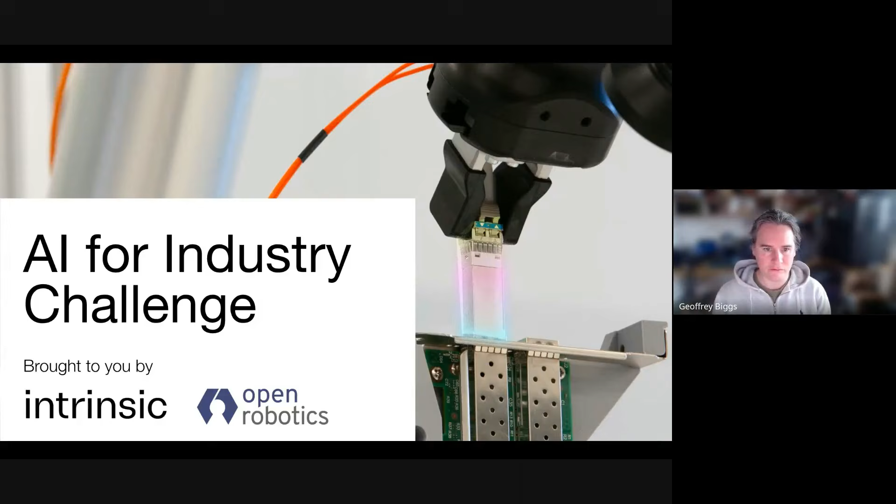I'm very excited to see this challenge kick off. It's been really exciting to see it come together. We've been involved in challenges at Open Robotics for many years, probably going right back to our founding, and we've seen just how amazing they can be for bringing people together, for bringing collaboration out, for triggering people to solve really complex problems. We've seen some amazing challenges over the years. My favorite is the sub-T challenge, which we did a few years ago, where people were sending robots into mine shafts to try and find stranded people.

It was amazing to see, and I'm really looking forward to seeing what this challenge brings out in terms of industrial AI. We're also very proud of how pivotal a role open source robotic software such as ROS and Gazebo plays in these challenges. Because these tools are free and anyone can use them, they really allow everyone to take part in challenges and see what they're able to do.

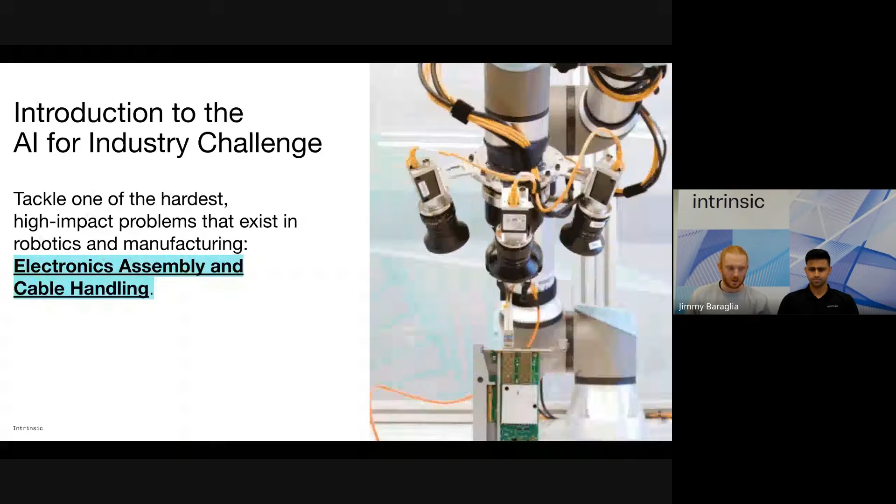So this challenge isn't just about incremental gain. It's about bringing state-of-the-art AI and robotics to this new wave of electronic manufacturing, and especially to cable handling. We are inviting you to solve the unsolvable: mastering flexible materials such as cable, detecting small connectors, and inserting them into a highly unstructured environment. This, in turn, will help power the next generation of global automation.

During this challenge, you'll be able to register your team. Reminder that we have a deadline for registering the team on April 17th. We are also welcoming partners to this challenge. You've just met Jeff from Open Robotics. We're also working with NVIDIA and Google DeepMind, and I think Yadu will tell you more about that in a later slide.

Now, this challenge comes with a significant prize pool of $180,000 that will be divided between the top 5 teams. The team that places first at the end of the challenge will receive a staggering $100,000. The second team will receive a very good $40,000. The third team, $20,000. The fourth and fifth teams will both receive $10,000. This will be a really competitive challenge, so we're looking forward to seeing who the top 5 teams will be.

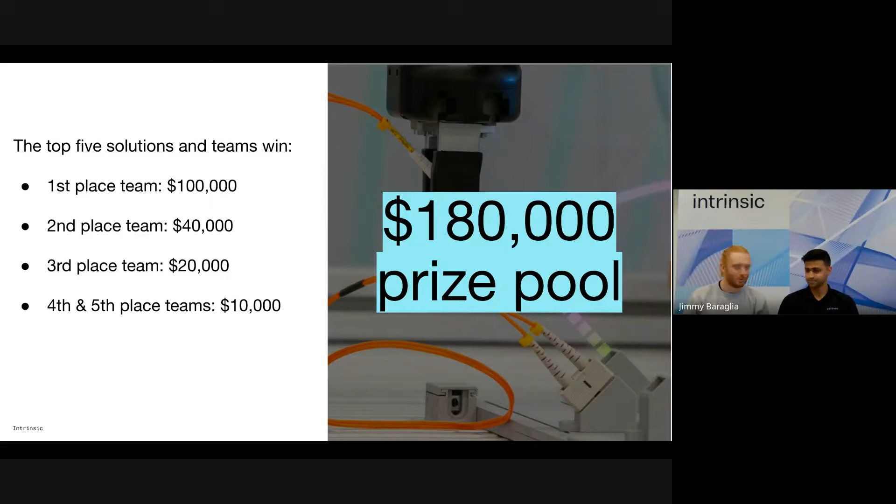Now, what task are we asking you to do? We are really looking at a high mix of cable handling and insertion. We took inspiration from data center and server assembly, and built a task board that reflects both of these aspects. There will be a high mix of cable types, 2 or 3 cable types with multiple connectors, and a network interface card. This represents what we've seen.

And why is this task difficult? Detecting different components and handling cables in a high mix environment is really difficult. There is also a very high cost of error. If you fail just one cable insertion, or if you damage one component, a whole server can be compromised, or a whole set of servers will be unavailable for AI inference.

And there is also a lot of complexity in modeling this high contact manipulation task and manipulating objects with deformable components. So you will be tasked with developing a flow policy and robotic behavior to solve this challenge, to manipulate and insert various types of connectors, providing an end-to-end automated solution for this electronic task using that task board.

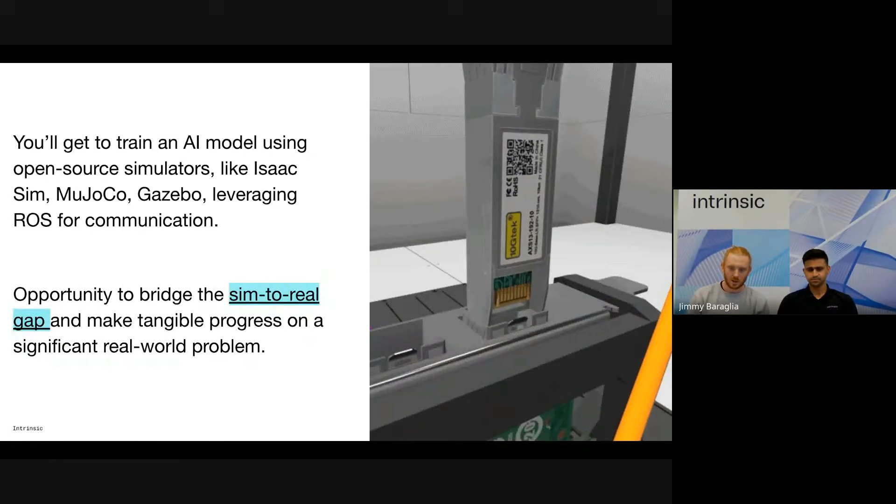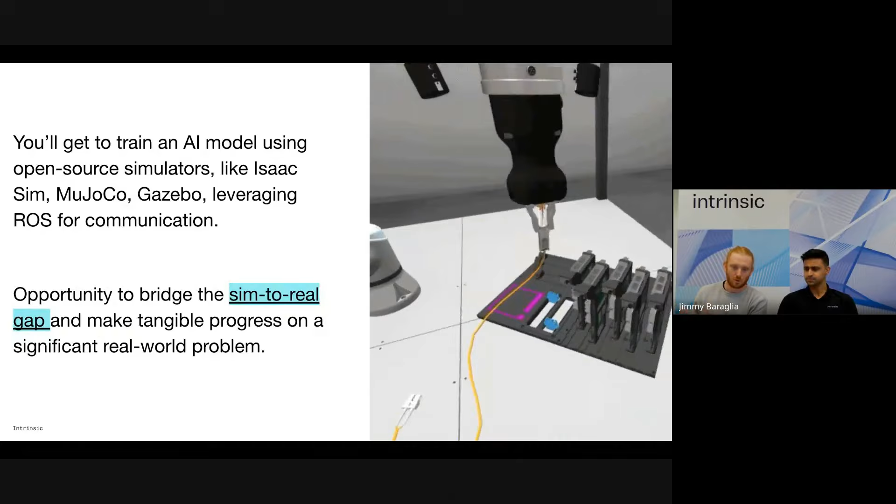To do so, you will train an AI model using open source simulators. We'll provide you with tools for Isaac Sim, MuJoCo, and Gazebo, as well as leveraging ROS for communication. Yadu will talk about that a lot more in depth once we get into the toolkit section. This will also be your opportunity to show that your model can bridge the gap between sim and real, not only working in simulation, but also making tangible incremental progress on real-world problems.

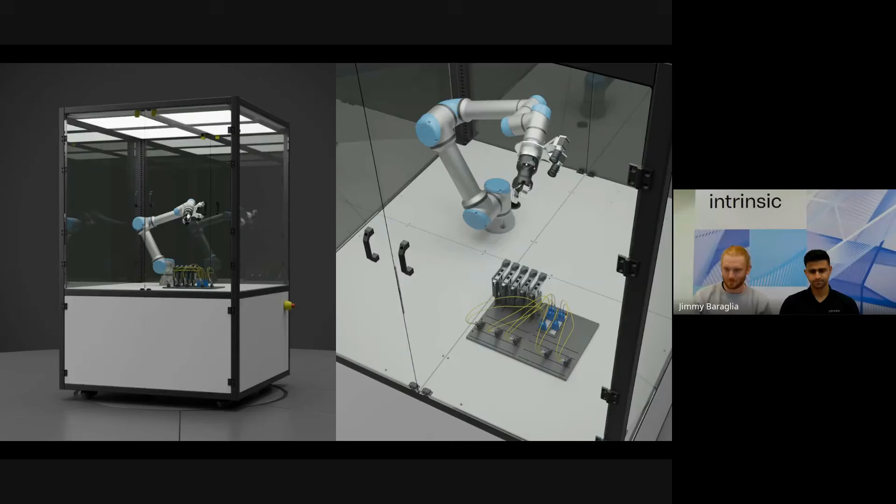All right, last but not least, I want to introduce our evaluation committee. As I mentioned, the goal of this challenge is to show how AI, open source tools, and the Intrinsic platform can add value in real-world use cases, and bring these solutions into the real world, not only in labs, but actually in automation factories.

This committee is a representation of the full automation ecosystem, from AI to robotics to open source and factory automation. They will ensure that the finalist submissions follow the vision of the AIC challenge, and that this vision is well represented in our winning team.

All right, now I'm going to hand over to my esteemed colleague Yadu, who will tell you more about how your solutions are evaluated. Thank you, Jimmy.

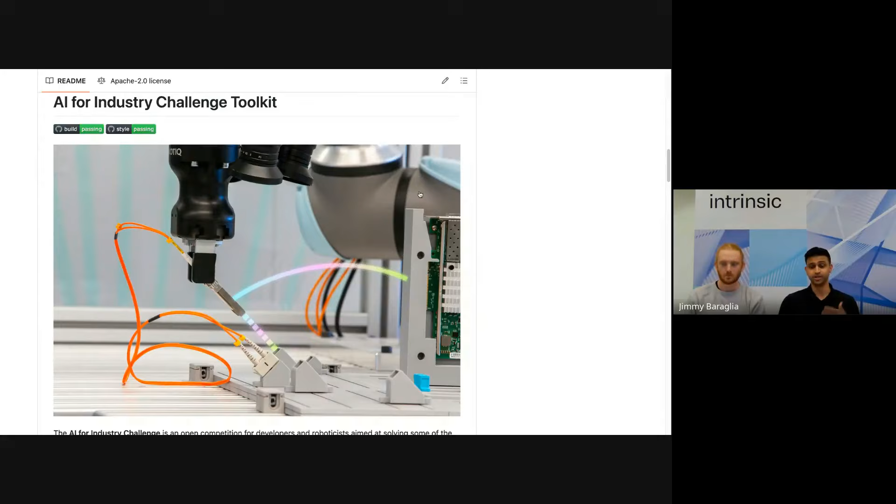Once you open up our toolkit, you should arrive at this nice landing page, which describes a lot of information. Throughout this webinar, we're going to focus on this toolkit guide section, as I feel this contains a lot of information for participants to understand the challenge, understand what's in the toolkit, and provides some guidance along the way, which would be beneficial.

Absolutely, they can come back to this document right here. Before we jump into those exact links, I'd like to take the time to describe the architecture. Now, this is the architecture we have for the qualification phase, and we've made it really simple for participants here. There are two main components in our toolkit: AIC eval, the evaluation component, and AIC model, the model component.

The AIC eval contains the Gazebo simulation environment, including the robot arm with end-of-arm tooling, all of the sensor drivers that we need to pipe data to and from the robots. It contains the task board, the electronic components, and it contains what we call the engine to orchestrate all of these as part of the competition.

All of this is provided by us. Participants don't have to modify any of this. We'll provide them a Docker container which they can use to run all of these systems.

What participants will be tasked to do is implement and package something called the AIC model. This is going to be a ROS 2 node that will have to respond to certain signals from the evaluation container, relating to a task request, to know when the task is completed, or any feedback along the way. We'll get into more about the requirements in just a second here.

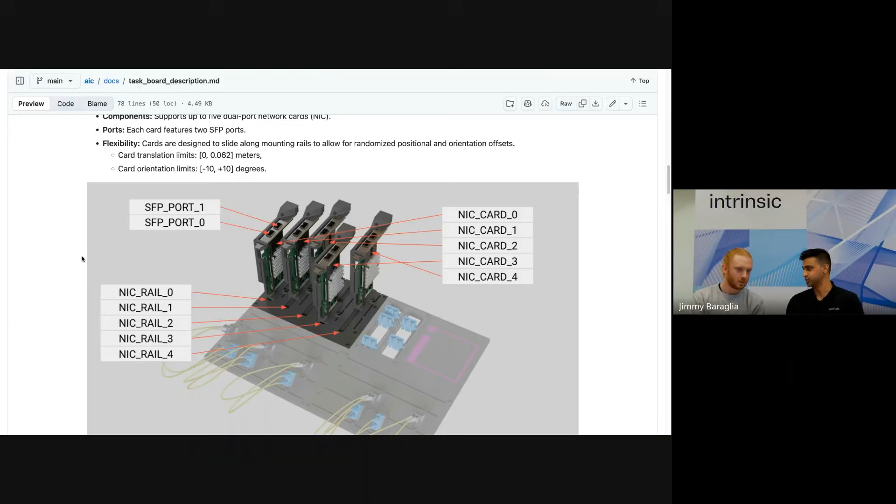Zone 1 is where the network cards will be placed, and during the challenge we will spawn 1 or more network cards, but the insertion task will always be a single insertion that needs to be done. It's important for participants to know what we mean when we say SFP port 1 on NIC card 1, and I'm hoping this document can provide that information. Similarly, they'll also have access to descriptions of the other zones.

We have SC ports that are placed in zone 2, and we also have some notation to clarify the names of these ports. So I do encourage participants to spend some time going through the task board description. It's going to be very critical to their success of their policy.

We also provide some links for them to purchase some of these components if they're interested in, but for the most part, they should be able to work successfully in simulation. And I think the 3D model will be available within March, correct? Absolutely.

All right, so once you're a bit more familiar with what's in the scene description document, we provide some guidance on how to explore this using some teleoperation scripts that we provide. So I'd encourage all participants to spend some time spawning different task boards into the scene, moving the robot around, getting a feel for how the cable behaves.

And while they're doing so, they can rely on their favorite introspection tools in the ROS ecosystem to be able to subscribe to data from cameras, from force-torque sensors, to really get an intuitive sense of the behavior in simulation.

Also part of the scene description document is a way for you to conveniently convert the scene in Gazebo to any other simulation. Out of the box, we're providing some converters to MuJoCo and Isaac Lab, but participants are free to use similar workflows to convert it to any other simulator of their choice.

So just as an example, by clicking through the MuJoCo guide, participants will be guided through the process of converting the Gazebo scene to a MuJoCo scene and being able to control the robot using the same ROS2 interfaces.

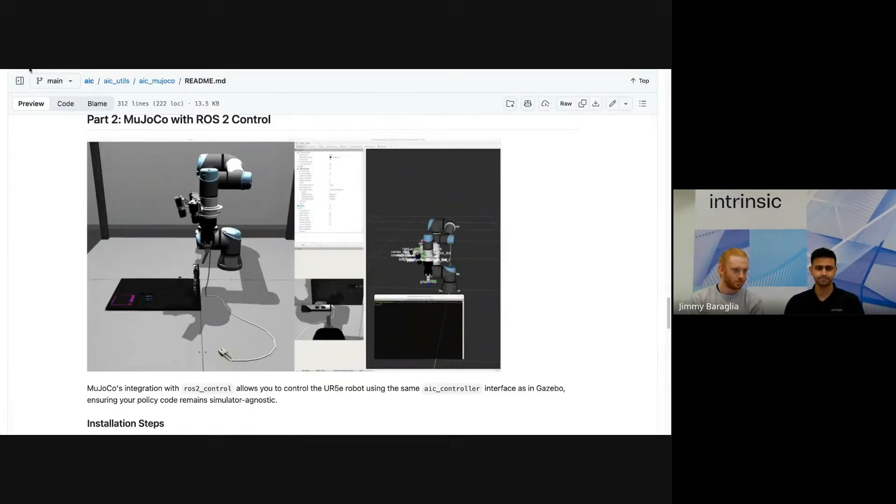All right, with that, I'm going to jump back to the qualification overview document. What's important to clarify is the scope of the task. I think we've stressed this a couple of times.

We'll be conducting several trials. In each trial, participants will have to do a single insertion only. The initial state is very narrowly constrained. The robot is always going to be holding on to one end of the cable, and there will be no unseen port or plug types.

Whatever you will encounter in the challenge is already in the toolkit in our assets directory. So it's worthwhile for participants to explore the assets that we have. The idea is that they can then focus on the model for this phase.

Precisely. And just a quick note on how the task will be described to participants. We have this ROS2 action request, which we'll be sending to participants when we want them to start doing the insertion.

And when we look at the fields in this message, they're mostly relating to the type of cable that's in hand, the type of plug that's in hand, the port we want to insert it into, and the component in which this port exists. So together with that information, participants should be able to engineer to fulfill this task.

A quick note on the orchestration engine. So we have a process called the AIC engine, which will be responsible for basically running the challenge. It will be spawning the task board into the scene, spawn the cable, and attach it to the robot gripper. It'll then give the task to participants to execute.

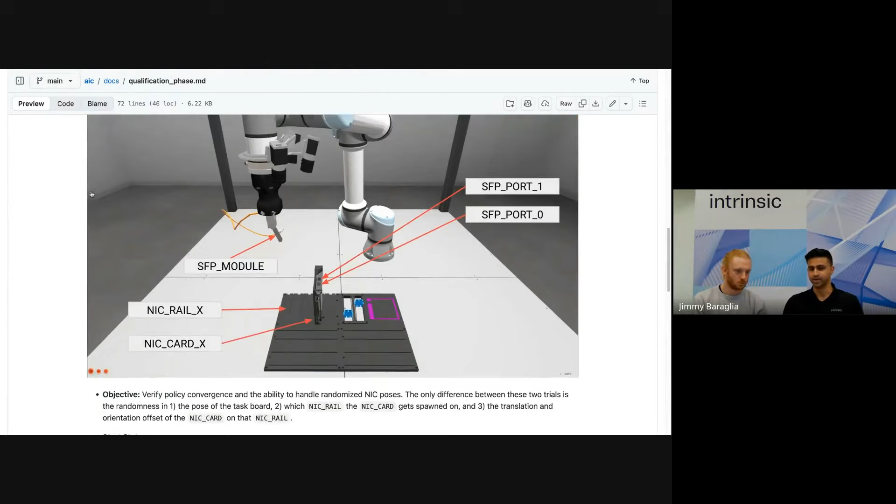And all of this can kind of be configured in a config to pass to the AIC engine. So that's also an important document for participants to look into. The remainder of this document details what the initial conditions look like for the different trials.

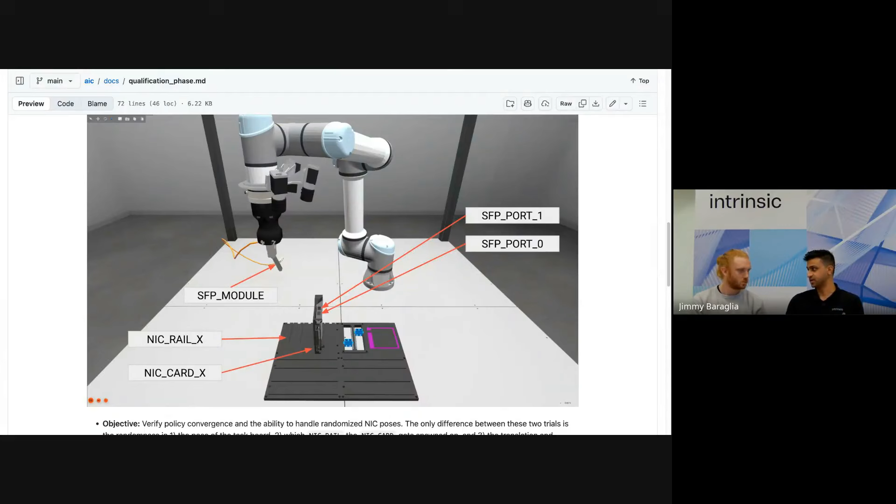We'll likely be running 3 trials for evaluation. And for all of these trials, you will see some combination of these 2 setups. So setup 1 is with the SFP module grasped by the robot. And the task will be to insert this SFP module into one of the SFP ports on any one of these NIC cards.

The second configuration participants can expect is grasping the other end of the cable. So now the other end has the SC plug, and now they will be tasked to insert this plug into one of the SC ports.

Understood. Can you tell us or tell the participant a bit more about how the submission will be scored? Absolutely. Let's jump right into the evaluation metrics and scoring section. For the qualification phase, we have a tiered approach to scoring, and we have three tiers that we'll be scoring participant models against.

The first tier is model validity. And here we're checking that the participant model conforms to certain challenge rules. And this is a good opportunity to go through those rules really quickly.

First and foremost, we really want participants to honor the spirit of the competition. As developers, we've done our best to restrict attempts to cheat and circumvent the system by blocking some calls participants can make to backend systems. But really, we want participants to think of this as a difficult engineering task and come up with solutions that have potential to be deployed in the real world.

We have some language here related to the prohibition of cheating, together with how we will try to limit some of this to the best of our abilities. But rest assured that all qualifying teams will be assessed individually to make sure that their policies honor the spirit of the competition.

What's more important and relevant to scoring are the technical specifications of this AIC model container. We don't want to be super prescriptive of what's running in this container. It could be a Python node, a C++ node, maybe even a Rust-based node. What's important to us is that this container responds to certain standard signals that we expect.

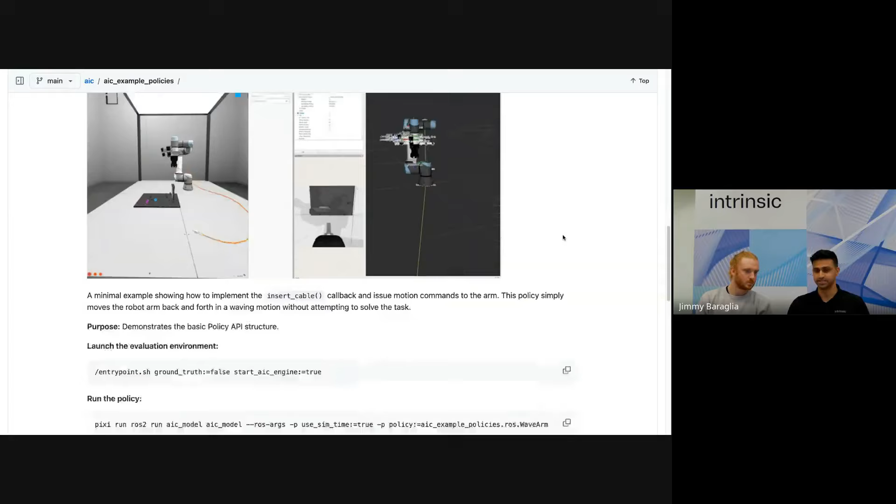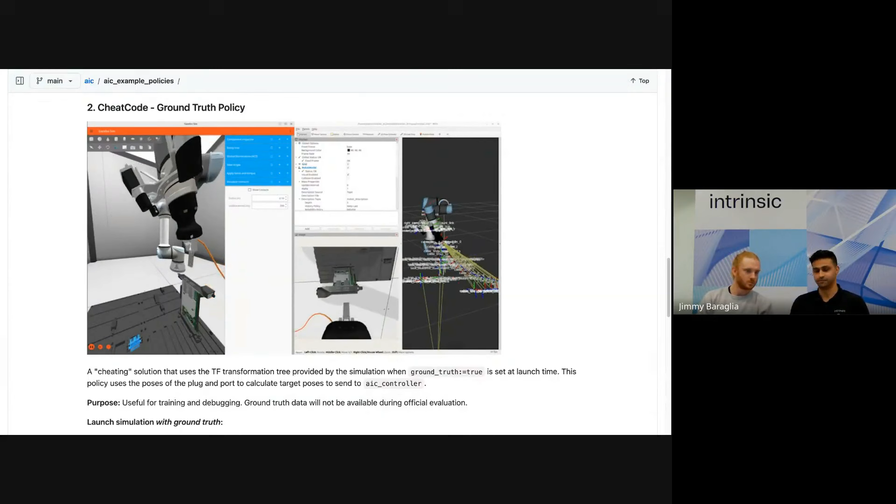We also have something called cheat code, which has access to some ground truth information. This is a way to show participants what not to do. During evaluation, they will not have access to some ground truth information in the form of poses in the scene, and this is a policy that makes use of that information to engineer an insertion.

So they could use that policy to collect data, for instance. They could — that's a very valid use of this policy.

Another policy example we provide is integrating an ACT policy, action chunking transformer policy, which we quickly trained using the LeRobot framework. That's becoming a really popular framework today in robotics, and I'm happy to share that our toolkit actually has some integrations with LeRobot.

Oh, that's great, so it's going to make it really easy for participants to teleoperate the robot, collect data, and train using existing tooling. That's great. There are also several other examples that we encourage participants to look through.

Now, to wrap things up, I would like to walk participants through a getting started workflow so they can get started as soon as possible, maybe right after this call. I'm going to jump back into the main toolkit README and click through the Getting Started guide.

Now, the Getting Started guide expects participants to be familiar with the architecture of the toolkit. This goes back to that main drawing we had in the README with the AIC eval component and the AIC model component. Your code here.

Exactly. And together with that, we also provide some requirements for compute. These are the minimum requirements for running the sim locally on your computer. And we also provide the exact specifications of the cloud instance, which will be reused across all participants' evaluations.

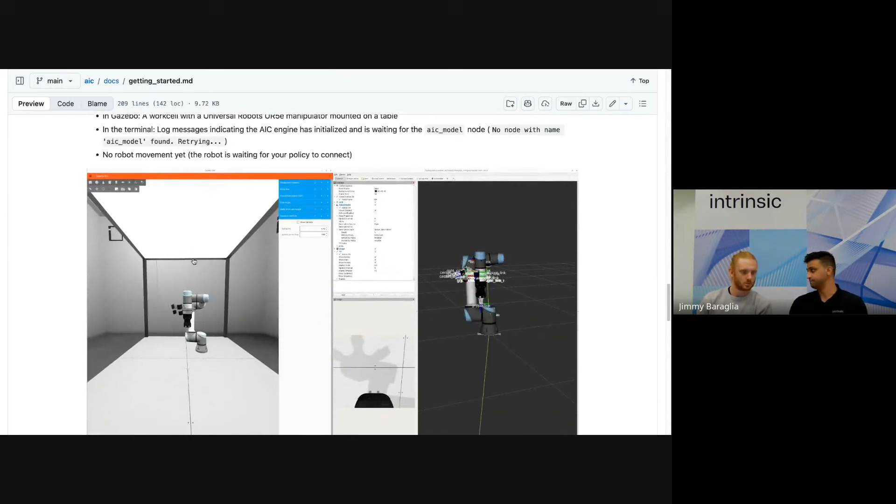To facilitate this, we're actually publishing our evaluation component as a Docker image that they can pull. We're encouraging participants to use DistroBox to load this image, and this takes care of forwarding things like device drivers and kernel interactions, and makes it seamless to bring up GUIs and leverage your GPU in the background.

So by following this quick start guide, you'll be able to launch the evaluation component. You'll be able to see Gazebo with the robot visualizing in RViz, and then you can try running one of our example policies.

So for wave arm, for example - this is a policy that's a bit of an Easter egg, or a joke, I would say. It does nothing but wave its arm back and forth. It's an example of how you could integrate a policy. And what do you think the scoring here is going to be, Jimmy?

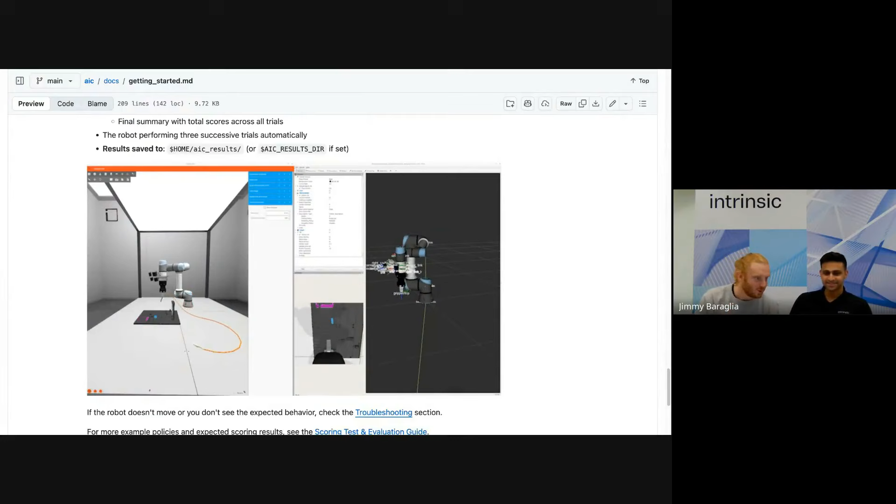I'm going to guess close to 1. Yes, I think that's a good estimate here. You should see a score of 1 as it passes the model validity check, but it doesn't get anywhere close to the actual ports for insertion.

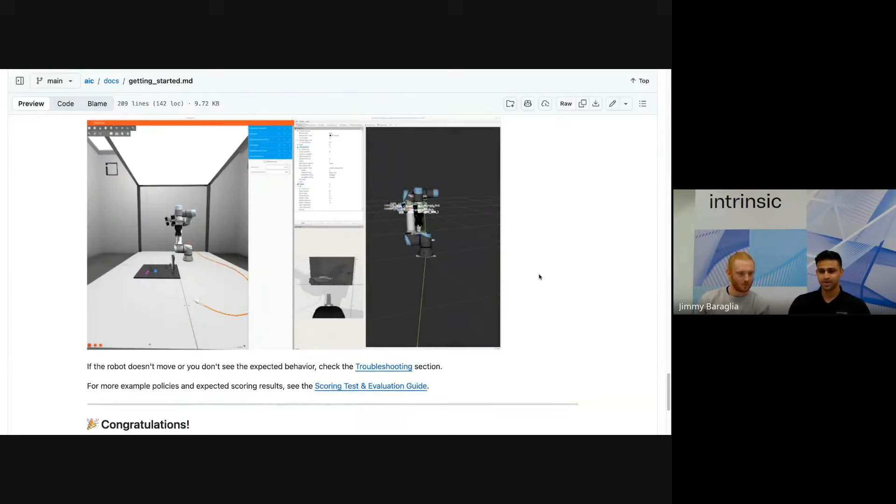Now, as you walk through this guide, you'll get some information on what you should expect on the different terminals. And once you have this set up, you will also be prompted to go through some of our baseline solutions and the rest of our documentation to get started.

That's great, Yadu. All right, with that, should we jump to how submissions actually work? Yeah, I would love to hear that. Thank you. All right, switching back over to our slide deck.

Once participants have developed their policies, tested them locally, and built containers out of these policies, they will be asked to make submissions on our submission portal. We'll be providing a link to the submission portal fairly soon to participants.

Once they have access to it, they will be able to start making submissions again once a day. Please reach out to your team leader to get this information, and please coordinate among yourselves on who will be making these submissions. My recommendation is there's a designated person to make these submissions on behalf of the team, or the team leader will be doing this submission.

Absolutely. So once they make a submission, our evaluation engine will start running their policy together with the evaluation environment. It will be running the exact same code you see in the repository and generate a score using the exact same techniques. But we will have access control measures in place to prevent cheating as much as we can.

Once the engine runs, the leaderboard will be updated with the latest score from the team, and this is an opportunity for you to also see how you do compared to other teams. I see, so you can see your score with respect to other teams. Absolutely. This is a competition at the end of the day, and we want it to be a fun competition for people. We can't wait to see how teams try to edge one another off.